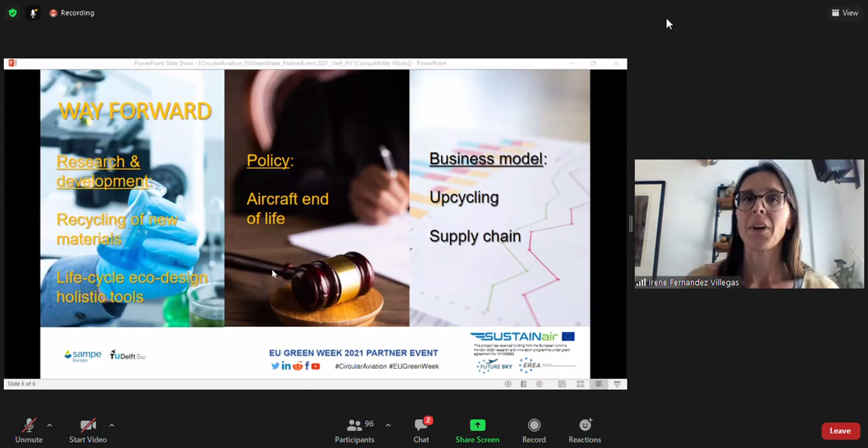I think we need to be ambitious, and instead of thinking of downcycling, we need to think of upcycling the materials. And also there needs to be a consistent supply chain for offer and demand of these recycled materials. So I hope I answered your question and I didn't skip anything.

Quite perfect. Thank you very much for this extended answer, and to give us some insight into SUSTAINAir, first explain what SUSTAINAir is, and also to tell us about the trends you observed, and of course the trends in material development and processing were very interesting, just for the whole audience to get a little bit in contact with these organizations, to know what they are doing. Thank you very much for your contribution.

Thank you. So switching to the next, I want to switch to Airbus, to Isabel from Airbus. So Isabel, we just heard that there is a lot happening and a lot of research work is done on the development of new recycling methods and routes and applications on the aircraft. Materials and processes enabling advanced aircraft concepts in the future are continuously developing with a focus on sustainability, on functional integration and digitalization.

And there's my main question: what trends do you at Airbus observe? And Isabel, where does Airbus see applications for such circular materials on the aircraft? Please, can you answer this question. For sure. Many thanks for this kind introduction and for all these questions. So I will try to focus really on the sustainability aspect here.

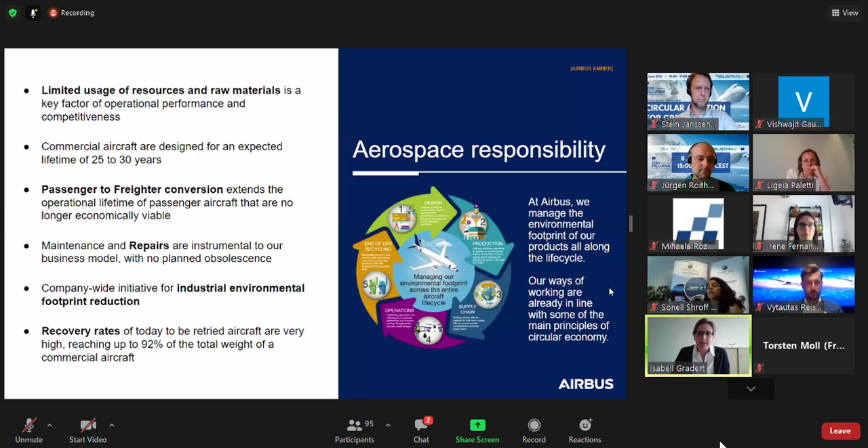Now at Airbus we lead the decarbonization of the aviation industry, and therefore we aim to develop the first zero emission aircraft to market by around 2035, in order to make sure that the next generation can enjoy flying as much as we do today. In order to evolve on circular economy principles, we focus for materials on three main aspects.

So first of all, the material inflow. What kind of materials are we using to produce our aircraft? Here we aim for using materials with an increased recycled content or bio-based content. We see good opportunities to establish for some specific metal alloys a closed loop in the future, but as well we want to move away from the total reliance on the petrochemical industry for composite or carbon fiber production by using biomass.

Material reuse is another very important element. So we try already to minimize the waste which is created during the production, but there is some unavoidable waste. This one we want to reintroduce back into the production. And here one good example might be that we are working on using composite manufacturing waste for reintroduction as interior material, for example, for the cabin linings.

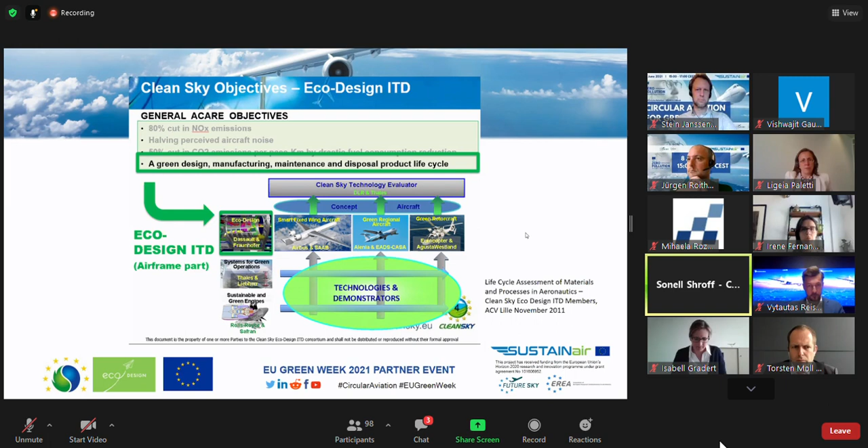Now, cut to the end of Clean Sky 1, we already had a list of demonstrators which were identified along with our partners, Fraunhofer, who will be presenting in the second session, so no spoiler alerts here. We had a number of demonstrators identified, and I share with you a very simple picture of some of them. You will see that they come from various categories, and include a lot of what was discussed before me by the other presenters on biocomposites and certain kinds of specific alloys. We also heard some of my co-speakers talk about hazardous substances. These are all things that we have been looking into within Clean Sky from Clean Sky 1 onwards, and now we are also doing the same in Clean Sky 2.

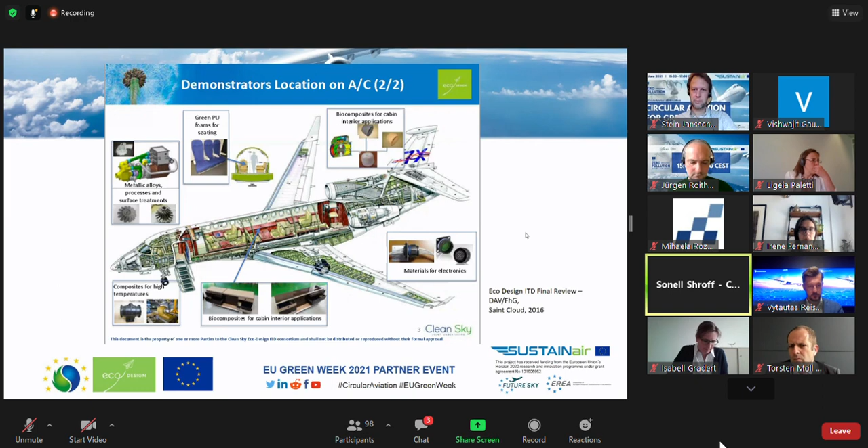So what I want to say is, with all the case studies, with all the work that went into Clean Sky 1 already since 2011, we have come a long way now to say that what all of us have been talking about is part of eco-design. It's not just to look at recycling, but also to look at how I can design a product which is recyclable. So even if we want to reduce weight and we want to make an aircraft more efficient, it's important to understand that the LCI data and the LCA that we get out of the tools that we use these days should help us make the right choices in the design.

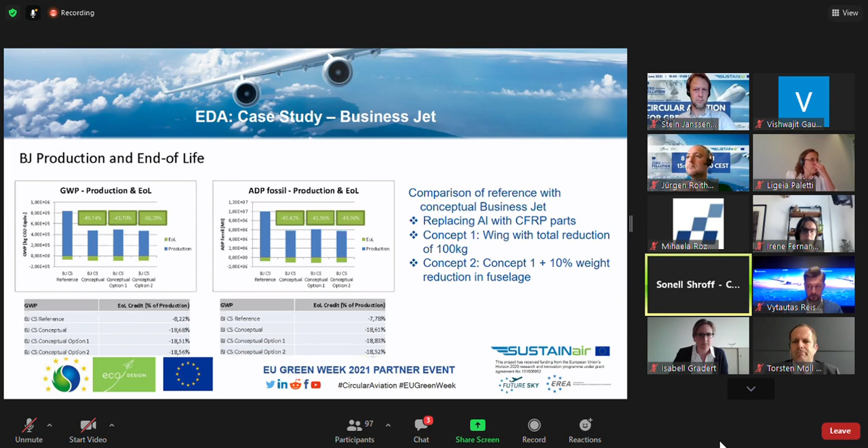So this is something that is part of every Clean Sky project. This is what we push all our partners to look into. So by default, if you're working with Clean Sky, you are focusing on green technology. There are a lot of nice keywords here for you to look at later on if you're interested. But this entire life cycle needs to be taken into account if you work on a project and you want to ensure that your product is going to be eco-design compatible.

At this time in Clean Sky 2, what we are busy with right now with Fraunhofer as the partner in charge of the EcoTA is that we are collecting a lot of LCI data from our partners, whether it is from the large passenger aircraft domain or from the fast rotorcraft or from airframes. And we are carrying out an LCA analysis on several key products, some example technologies, also processes, and we hope that at the end of the Clean Sky program in 2023, we will have eco-statements on these demonstrators and technologies to share with you and to disseminate the information that it is absolutely worth considering this approach in your entire life cycle.

And there are several examples of projects that we have been working on. Some of them, to name a few, would be the Copperbird, which is a ground testbed. We also have some eco-design for airframe projects, small and large. But I think I will stop here and I will leave the rest of the projects to be discussed at the next discussion with Torsten and with Rainer, my colleagues from Fraunhofer, in the next part of the program.

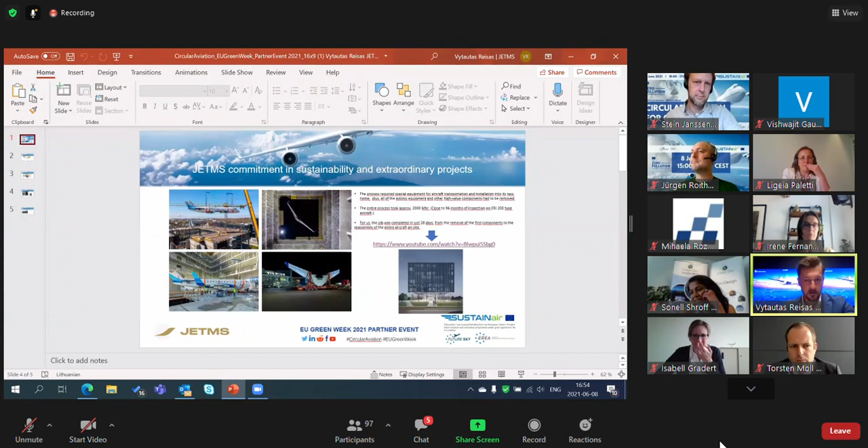Yeah, sorry for that.

So, of course, teardowns and aircraft utilization is just one part, and this project was one of them. We had a similar project where the aircraft also took a last ferry flight to Finland, to an Aviation Engineering School, and will be used as a simulator there. So that's also one of the same projects.

And answering your question, Jürgen, what kind of challenges for MROs? Of course, MRO is acquiring increasing commercial and, I would say, socioeconomic significance. So all those products and goods with high investment costs and long lifespan, especially in sectors like energy, transport, and aviation itself. A considerable portion of commercial profits are generated by after-sales services, what we call aftermarket. So it's really important to switch to predictive maintenance.

There is still a quest how to best predict the maintenance and plan the events, and to ensure that these maintenance processes are not just scheduled, but the aircraft is in an optimum location, and to maximize the availability of our maintained assets.

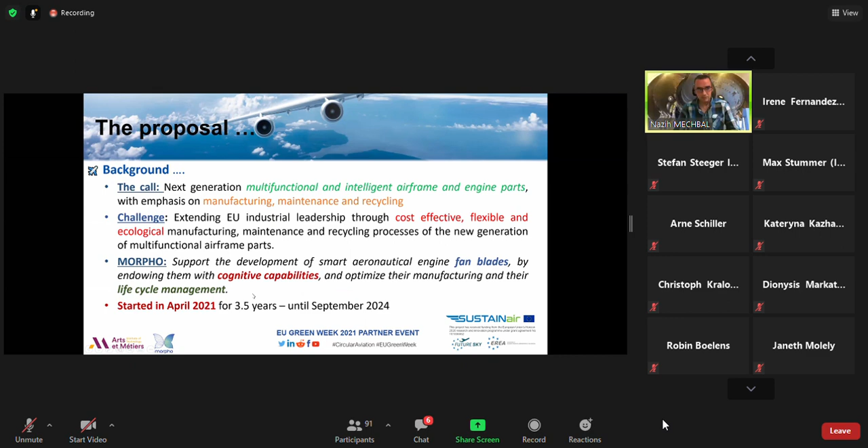The project just started in April, so there are no new results, but I'm going to give you a big picture of what we are going to try to do during these 3.5 years. In Morpho, we want to design an innovative, robust, and environmentally friendly industrial process for this type of airframe parts that are multi-material structures. And we are going to give them some intelligence, some smartness, by embedding them with sensors from manufacturing to recycling. This relies on embedded sensors. In parallel, we are going to develop hybrid twins that will follow the real life cycle of these structures.

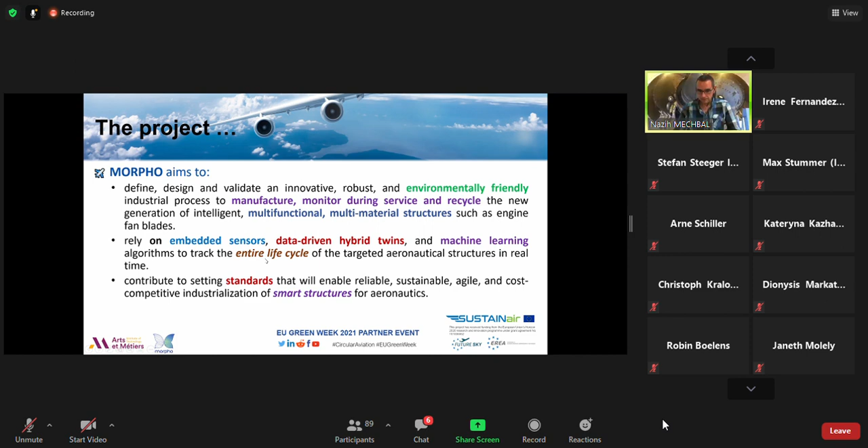Just the consortium: 10 partners from 6 countries. The coordinator is ENSAM, CNRS. Then we have colleagues from TU Delft, Patras University, and some end users, principally Safran. This is done typically for airframe parts for the engine from Safran. We have Fraunhofer, one startup, which is FiSens, typically for fiber Bragg, and ESI helping for the digital twin part of this project.

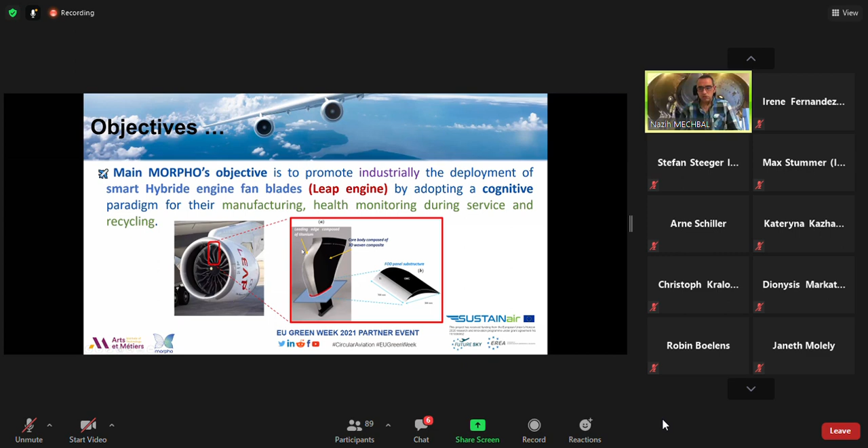What I was talking about is this type of fan blade equipping the LEAP engine, a famous engine from Safran that has worked very well these last years. This fan blade is made from hybrid materials, a leading edge in titanium and the core in 3D woven composite. The idea is to work on this fan blade from its manufacturing to its recycling. The concept is the famous circle we saw in the first session this afternoon. We go from design, manufacturing, embedding sensors to do predictive health management and structural health monitoring. For manufacturing, these sensors will be used to automate and optimize the control. They will also be used to optimize disassembling, and then see if we reuse or completely recycle some parts of this smart fan blade.

This cognitive capability will enable us to do a virtuous cycle like that using digital data, from the hybrid twin and real data coming from the embedded sensors.

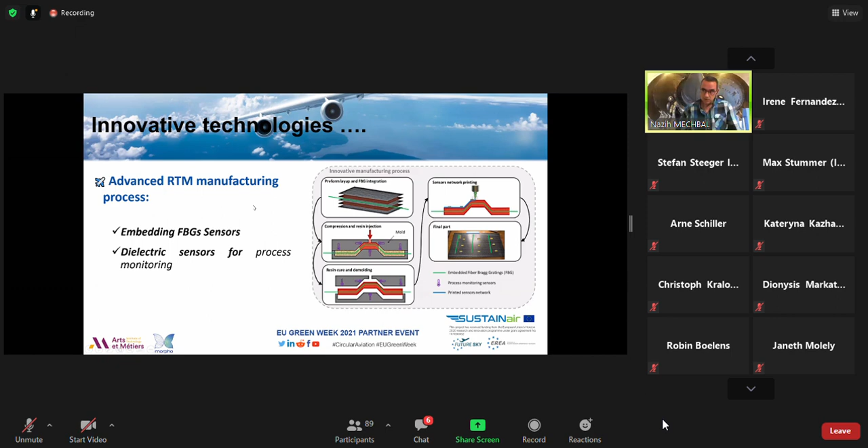Some innovative technology that we hope to validate is advanced RTM manufacturing. This kind of structure is manufactured with the resin transfer molding process. We propose to embed this process with two types of sensors: sensors used only to optimize the manufacturing process, and sensors used twice, with two targets, to optimize the process and also to be embedded, like fiber Bragg sensors in the structure, for life cycle management afterwards. We are also going to work on printed electronics sensors printed directly on the structure after manufacturing. Lightweight construction, with all the electronic system printed directly on this fan blade.

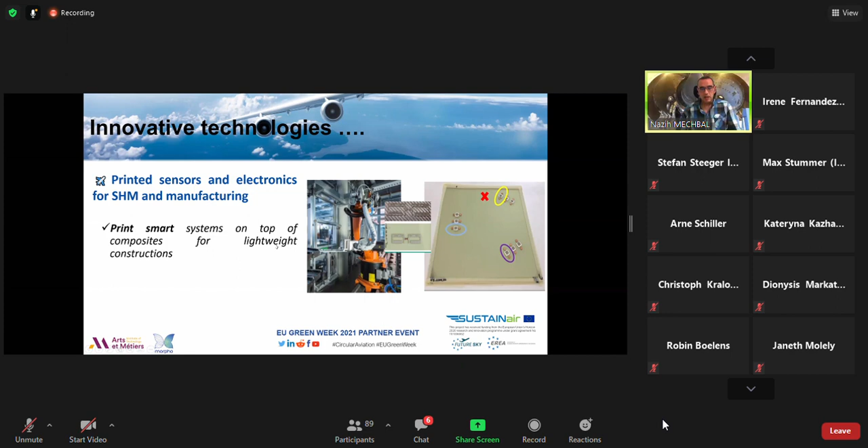And then with all of these sensors, we are going to develop a hybrid twin. So the hybrid twin goes a little bit further than a digital twin by using a machine learning approach to identify the mismatch between the digital and the real data. So what we know will be in physical and numerical models, and what we don't know can be identified, can be learned from these sensors with a machine learning approach.

And with this type of hybrid twin, the idea is to work on a reduced model that can be adapted on the fly using the data provided by the sensors. So it is work that we are doing from this. We began to work on this kind of algorithm and modeling approach.

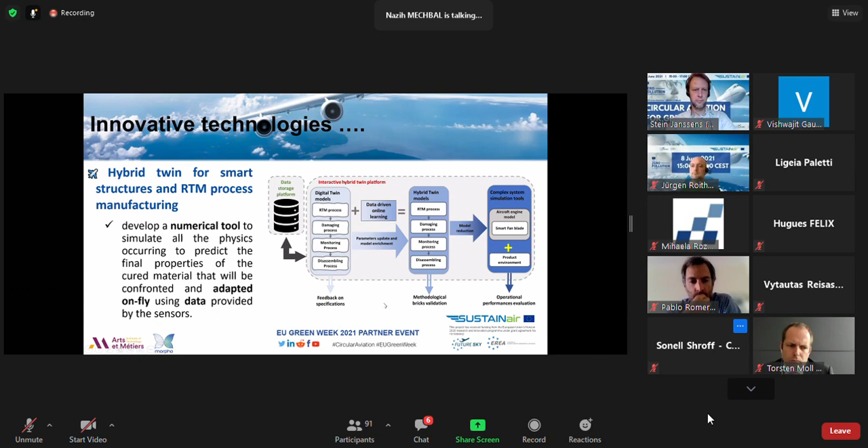So this is the data, and then we put this reduced model in the complex system simulation tools that Safran developed, which can then give us some insight on the performance and what happens on the structures, up to a virtual flight test. So we can put this small model in a complex one, a system of systems, and then see what happens. And in the design we optimize, and we optimize also the impact of this choice on the in-service life of the structure.

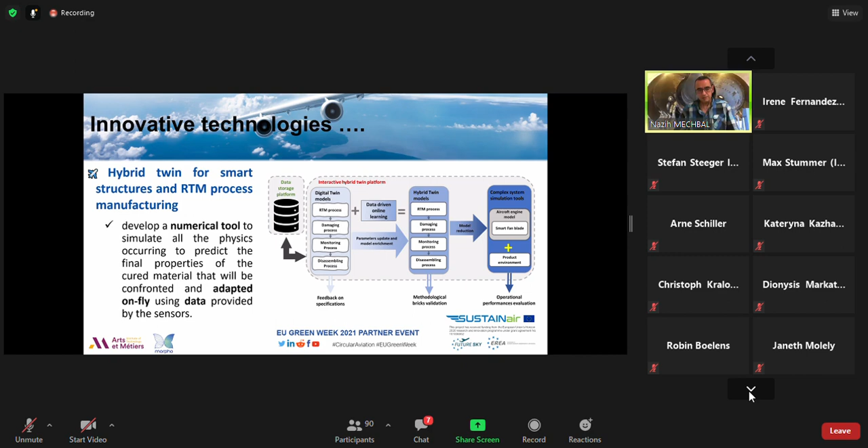This will be conducted with the development of specific probabilistic SHM data-driven methodologies based on this kind of approach, because we are going to work on this fan blade in a rotary test bench to see what happens and the effect of all these loads on it, and the fatigue test to generate algorithms that can give a prognostic on the remaining useful life.

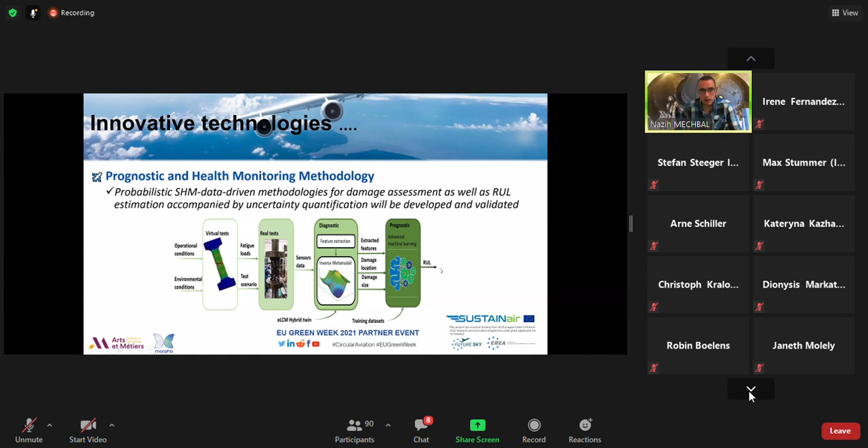And finally, if we see that there are damages that are severe, or it's the end of life of the structure, then we are going to use two types of recycling technology. Laser induced, what we call laser shock, laser peening, for disassembling the composite from the titanium part of the structure, because the titanium is something that we want to keep, and then all the parts of the structure can be recycled using pyrolysis technologies.

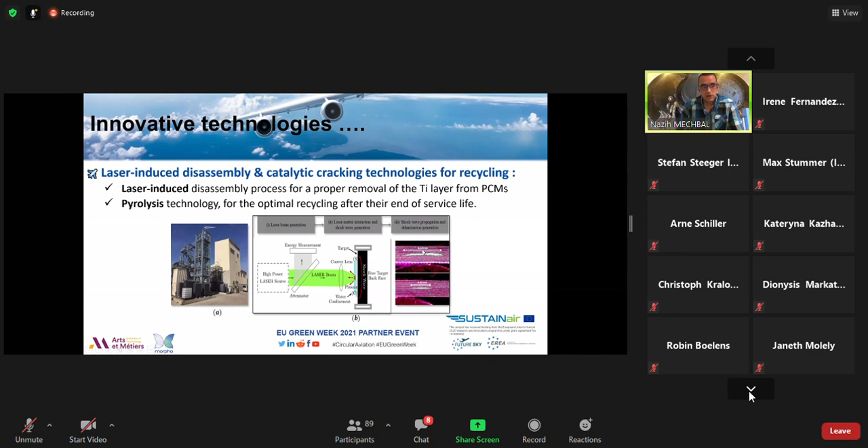So here you have the laser beam with which we can generate controlled delamination directly in the layers. Okay, so here you have some outcomes that we hope are going to satisfy, from design, production, performance, and recovery, disassembling. We have 100% recovery of, let's say, FRP from PCM.

Back to the design, because if we have something that has the functionality to track its health, then we can go back to the design and have a damage tolerant design instead of a safe-life design, which is now the case.

That's all. I'll just wrap up here what we want to do. Have environmentally friendly manufacturing and recycling, push industry in line with the European Commission circular economy, disassembly of the hybrid material, give new processes to help the disassembly of hybrid materials. Competitive cost in line with the concept of circular economy. Thank you.

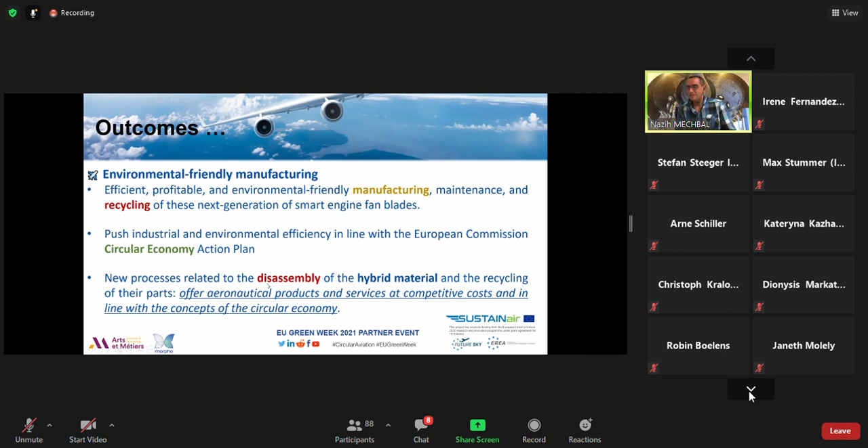Thank you very much, Mr. Mechbal, for this insight into, I would say, Industry 4.0 technology and the applications into smart structures, actually.

Now, speaking about digitalization, the next showcase project, which is DOMMINIO, sets out a number of technology enablers, including digital twin and advances in simulation that will improve manufacturing efficiency. And also automated tape laying, automation, reversible joining, etc.

Now, Mr. Pablo Romero Rodriguez from the AIMEN Technology Center in Spain is with us today to give an insight into the project's activities. Mr. Rodriguez is R&D program manager focused on advanced materials manufacturing for the transport sector, and an expert in the field of digitized manufacturing systems. He is also project manager of the DOMMINIO project. So welcome, Mr. Rodriguez, and the floor is yours.

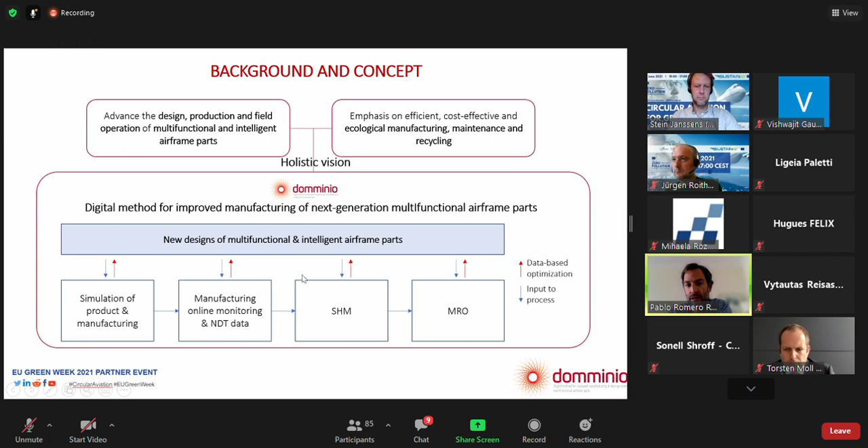We are going to develop several filaments for fused filament fabrication. One dedicated for disassembly based on magnetic nanoparticles, others dedicated for reinforcement and multifunctionality. So we are going to use continuous carbon and continuous carbon nanotube fibers for strategic reinforcement within the plies, and also for introducing sensors and heating elements for de-icing, for example. And we are going to study the combination of tape laying and fused filament fabrication so that we can optimize the process parameters and the sequence itself.

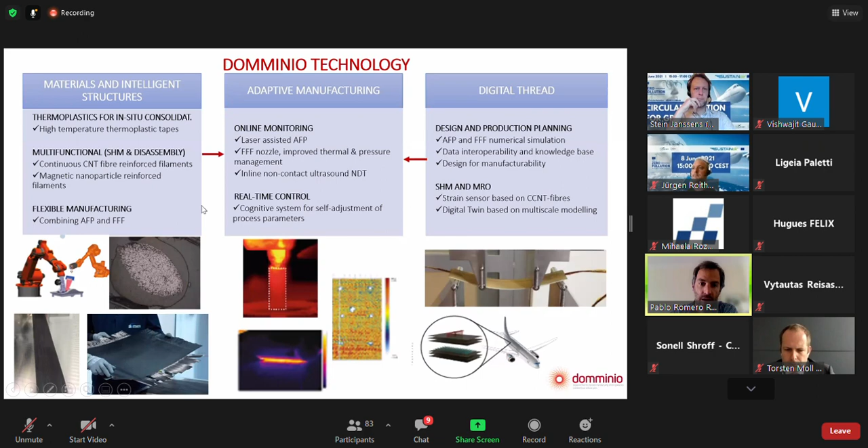So this picture tries to summarize our concept. It's just to give you an overview, which I think easily explains what is going on. So we have, let's say, 3 stages in the life cycle: the product and modeling, the manufacturing, and the field operation, right? So the idea is that we are going to store the data from engineering. We are going to store data from manufacturing out of the sensors, as I mentioned before, the quality control systems, and also the structural health monitoring data.

So this is the idea, the feedback loop towards, on the one hand, a self-adaptive system. So we can come up with optimized engineering schemes for proper manufacturing of the composites, and also to provide value in the multidisciplinary design optimization software, which is the main output of our project, to integrate design for manufacturability rules that will make automated tape laying and fused filament fabrication one of the manufacturing technologies of the future.

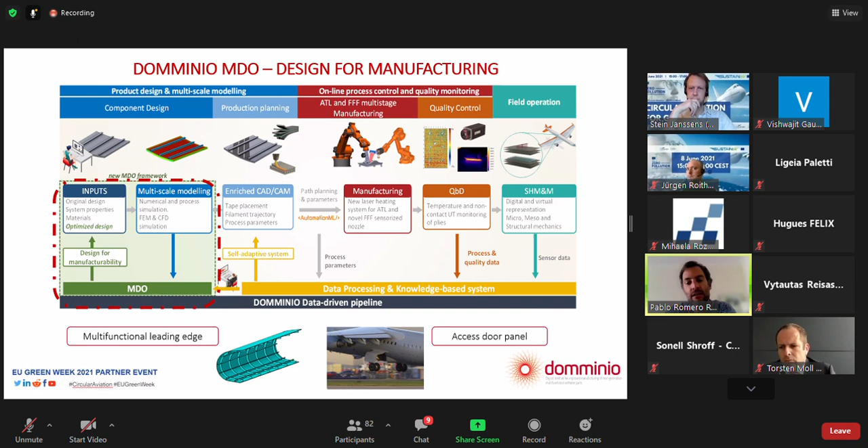So yeah, this is the main message from DOMMINIO.

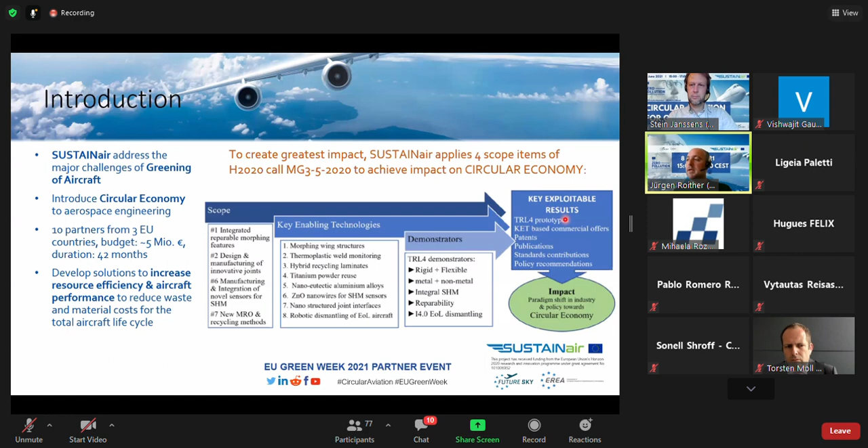So first, from the call we picked up 4 scope items: the morphing features, the design and manufacturing of innovative joints, the manufacture and integration of novel sensors for structural health monitoring, and new MRO and recycling methods. We develop during the project 8 key enabling technologies to end up with demonstrators having these favorable properties. And with this all together, we want to gain key exploitable results to make impact on the circular economy approach. Here is presented the overall concept, the overall idea of the circular economy in aviation.

So as Liché already pointed out during the panel discussion, this was born at the meeting from EREA, and then the circular economy approach was provided to the audience, and here we had in the consortium an application to gain this project for the circular economy approach in aviation. So we are starting here with some raw materials, some first life materials, and maybe also with some remaining materials from the recycling, the so-called second life materials. Taking these materials, we start this circle of economy with the design requirements, taking into account the first and the second life scenarios. So a rather new way of design.

Then, based on these requirements, coupons and elements for aircraft are manufactured, applying innovative joints and joining technologies, and then damage diagnostic systems for maintenance to extend the aircraft components' lifetime to a maximum. Then when the end of life of the aircraft component is reached, we obtain some automatic dismantling technologies to maximize the amount of remaining material and thus to enable a second life for it, to result in a second life demonstrator.

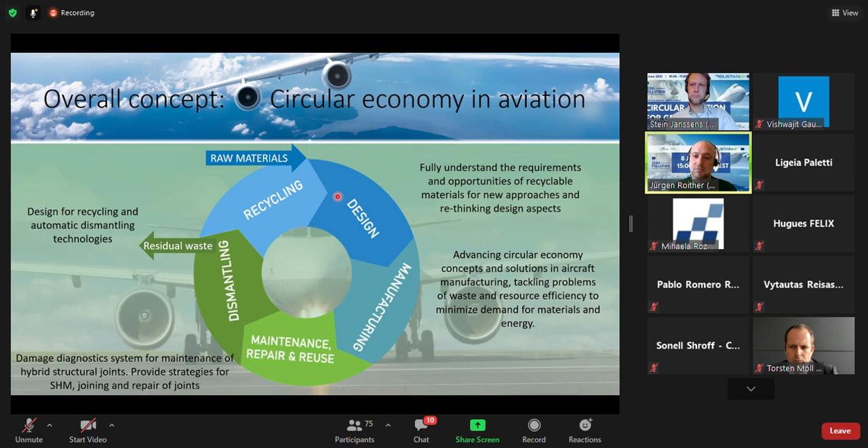These design requirements will directly feed the following work packages. In work package 2, circular manufacturing is investigated, including second life. Then we have work package 3. Work package 3 is the damage diagnostics work package for structural health monitoring of hybrid structural joints.

And then we have work package 4 to develop joining and repair technologies for similar and dissimilar material combinations. In work package 5, the second life demonstrator is realized with a maximum set of work package 1 to work package 4 features included. Okay, and the scientific and technological work packages I've presented here are accompanied by dissemination and communication activities, and of course also by the coordination and the management of the project.

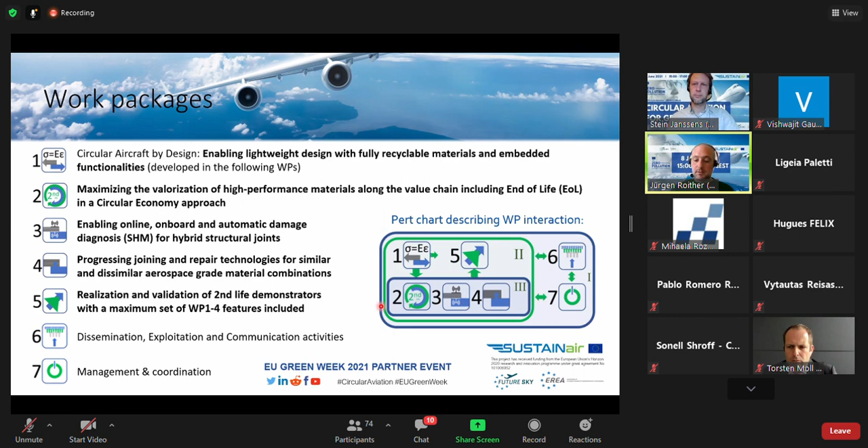So let me jump directly into the partners and show their main competences they bring into the project and their main contributions to realize this second life demonstrator. First I want to start with the RTDS group. RTDS group is the work package leader for the dissemination, exploitation and communication activities, and does project management assistance. Then we have the scientific and technological partners, starting with NLR.

NLR focuses on the research and development of composites. As you can see here, they have a robot cell for the induction welding of thermoplastics. For rivet removal, they have a lot of know-how. They have know-how in circular aviation and circular manufacturing, and also in the monitoring and testing technologies we need for testing the composites.

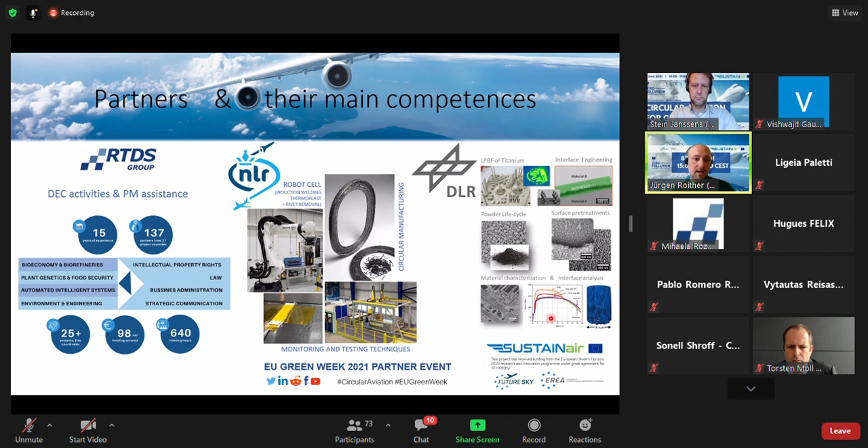The next partner is DLR. DLR are specialists in making use of titanium. They're using the laser powder bed fusion process to 3D print new structures, and also to characterize and develop materials. The next partners we have on board are Joanneum Research. On the one side, they have competences in laser welding and laser-directed energy deposition. On the other hand, they are specialists in the synthesis of zinc oxide nanowires for nanowire sensors, and in the integration of such sensors into or onto surfaces of samples by making use of plasma deposition.

The next partner is JKU, Johannes Kepler University of Linz, the Institute of Lightweight Design. They are specialists in damage tolerance and structural health monitoring, so they are leading work package 3, damage diagnostics. Then as a next partner, we have TU Delft. TU Delft, already mentioned several times today, are specialists in aeronautical structures. They are leading work package 1, where we derive the design requirements. Of course, they are also specialists in numerical damage analysis and joining techniques.

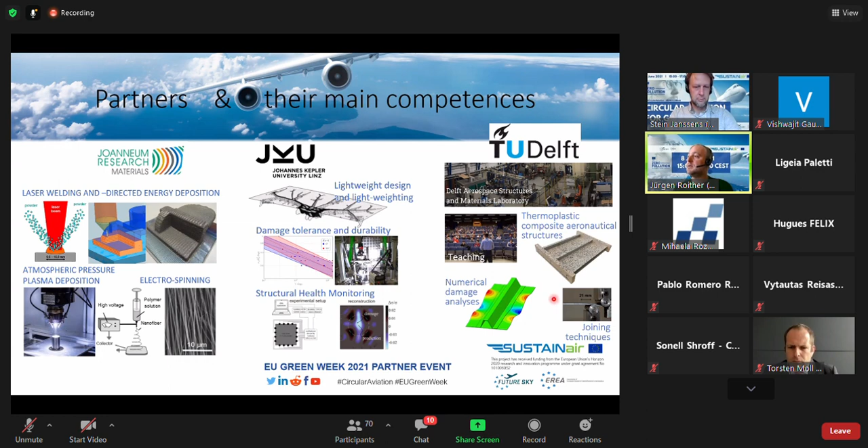Next we have the company Inocon. They develop these plasma technologies together with Joanneum Research and try to commercialize such functional coatings. Then we have the company Invent. Invent is also working mainly on the composite side, starting from the aviation or space industry. They have a highly elaborated field: research and development through design and structural analysis, prototyping, assembly, and also series production and quality management of composite structures. And then we have another company, DTC, on board. They are also specialists in thermoplastic composites, molding processes, testing, and so on.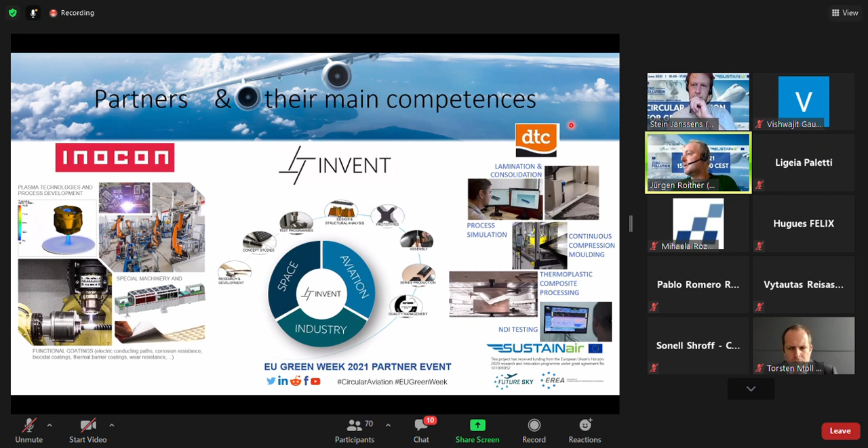And finally, we have the Austrian Institute of Technology, AIT. As Stein already mentioned at the beginning, we are not specialists in composites, but we are specialists in light metals and light metal processing. We do advanced casting processes, forming technologies, component simulation, material development, alloy development, and material testing, and we can also contribute with wire arc additive manufacturing of aluminum wires. So this is the whole consortium with which we aim to achieve the goals we defined in the proposal and to obtain a second life demonstrator.